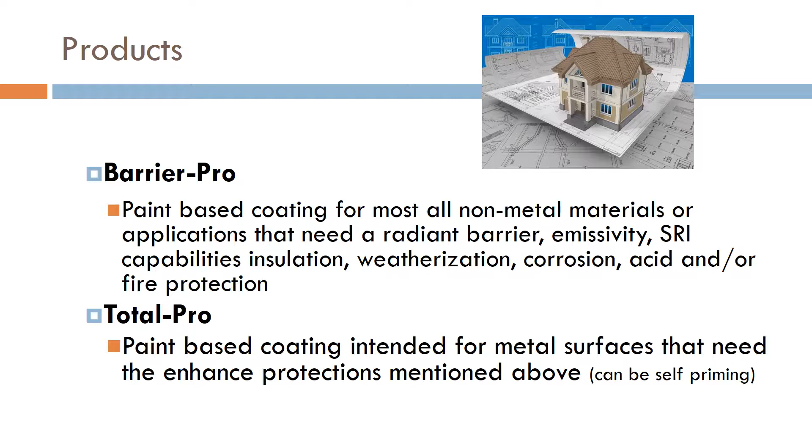corrosion, or fire protection is needed. Total Pro is intended for metal surfaces and provides the same protections mentioned above.

With recommended R values, on average 50% of a total home's energy use is still directly attributed to heating and cooling loads. Slabs account for 20%, ductwork 13%, and roofs 13% of total heating and cooling loads.

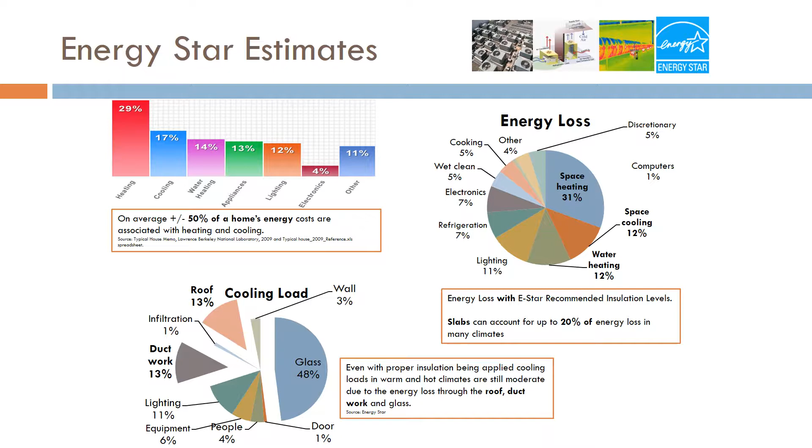The industry's primary use of R value to base insulation energy recommendations on is why 35 to 50% of energy costs are still directly attributed to heating and cooling.

There are numerous issues with R value itself, including being dependent on temperatures, making it very manipulable. Of the three primary measures of energy loss, R value, or conduction, is a tertiary or third line of defense

for energy savings. Heat energy can first be either reflected or absorbed, second can be emitted or transferred, and last can then be conducted at a measurable rate.

This rate of conduction is R value. The three secondary variables deal with convection and moisture and can easily be mitigated through proper weatherization protection.

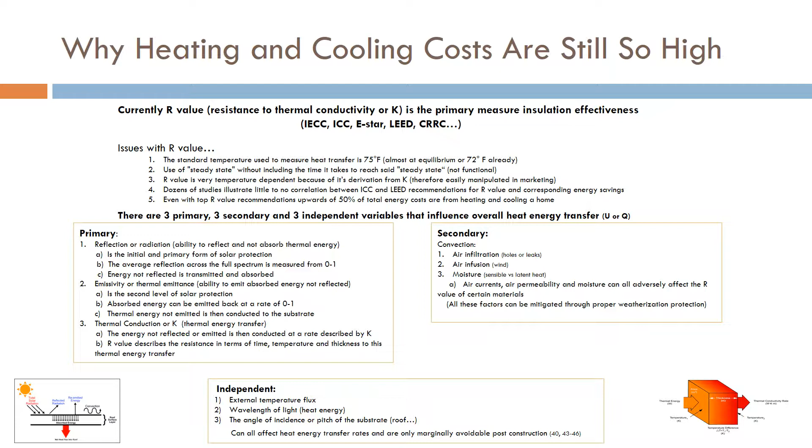Solar reflectivity is the average percentage of solar energy reflected across the full spectrum. This is measured in ASTM E1918.

Solar reflectivity recommendations vary by organization and pitch of roof: 25 to 29% plus for steep pitches and 65 to 78% plus for flat low sloped roofs.

Average reflective products range from 25 to 80%, and Harbrin coatings range from 89.1 to 99.8%.

Emissivity is measured in ASTM E408. Average products range from 20 to 60%, and Harbrin coatings are rated at 77 to 91%.

The Solar Reflectivity Index utilizes both the reflectivity percentage measured in ASTM E1918 and the emittance measured in ASTM E408. Recommendations range from 29 to 78, and Harbrin coatings products provide 88 to 100 plus.

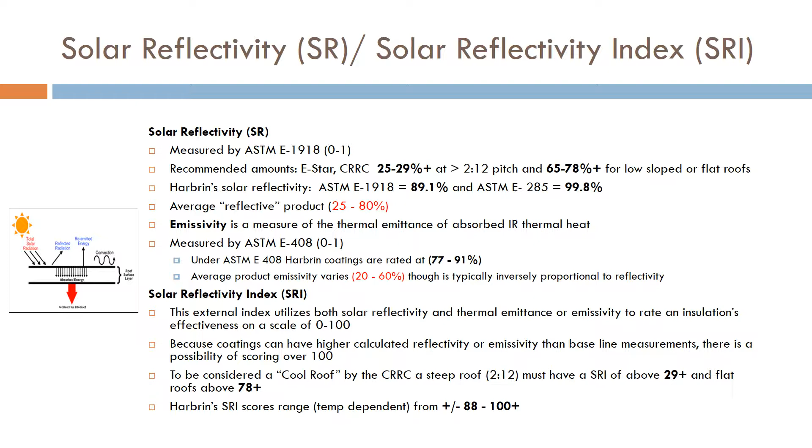Harbrin coatings far surpass any organizational, local, national, or international code under IECC code requirements for reflectivity, emissivity, and SRI values. International and local code varies.

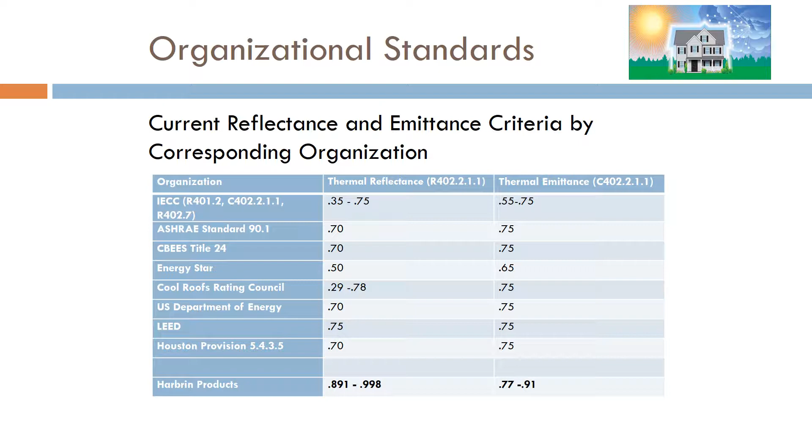However, Harbrin meets and exceeds energy savings IECC code with our ASTM E1918 and ASTM E408 certified testing.

We also meet and exceed most ICC or IBC fire code requirements with our certified ASTM E136 testing.

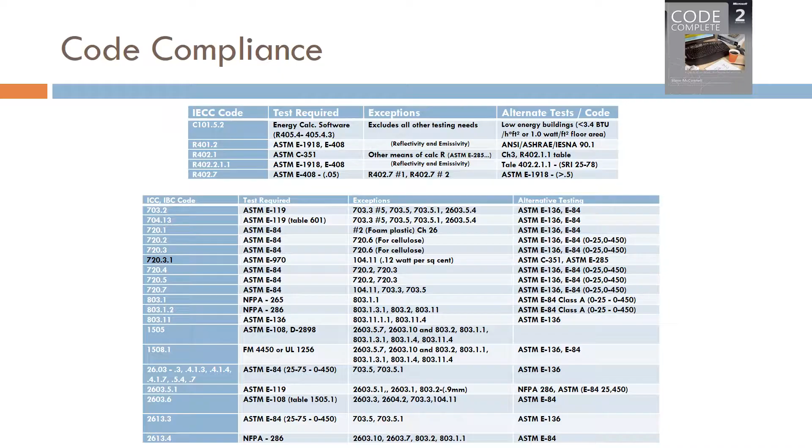Harbrin coatings have numerous other certified ASTM testing for weatherization, corrosion, fire, and insulation protection as well. Harbrin coatings are environmentally friendly with low VOC counts.

The coatings are easily applied with traditional paint applicators with minimal health or safety precautions. The DOE, CEC, DoD, Geoscience, Southwestern Laboratories, and other companies have all further functionally certified our ASTM data.

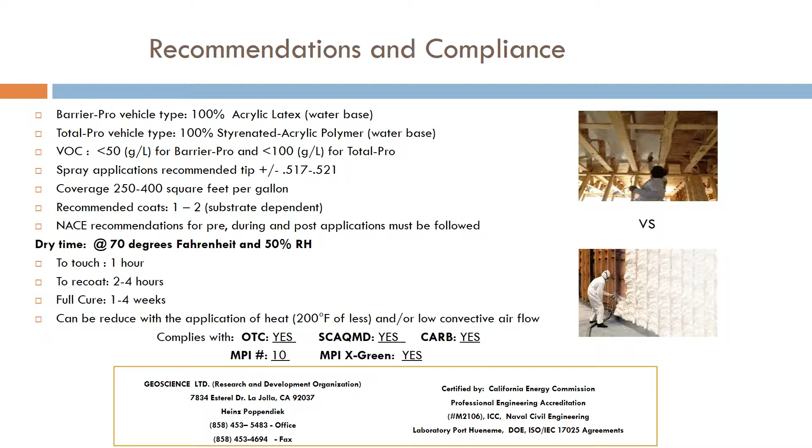Barrier Pro is intended as an exterior protective coating, however, can also function inside between air gaps, in attics, ventilation ducts, plumbing, furnaces, slabs, and more.

Surfaces including roofs, stucco, wrapping, wood, asphalt, brick, concrete, metal, and numerous others. Total Pro is intended for most all other metal surfaces and can be self-priming.

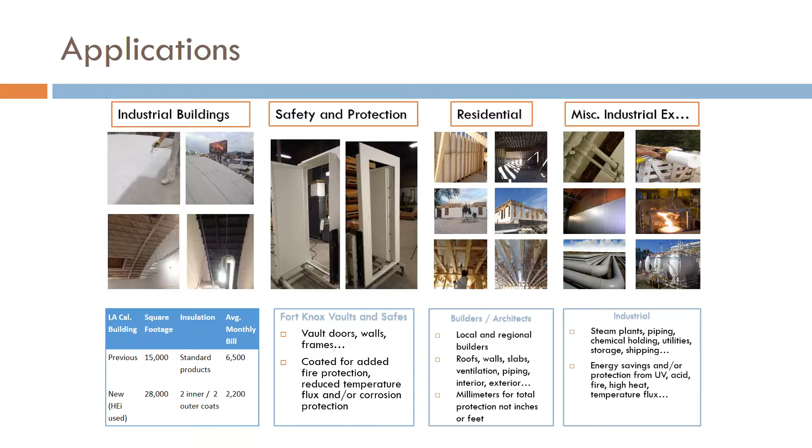Barrier Pro covers 200 to 400 square foot per gallon at a cost of 25 cents per square foot per coat. Total Pro covers 200 to 400 square foot at a rate of 50 cents per square foot.

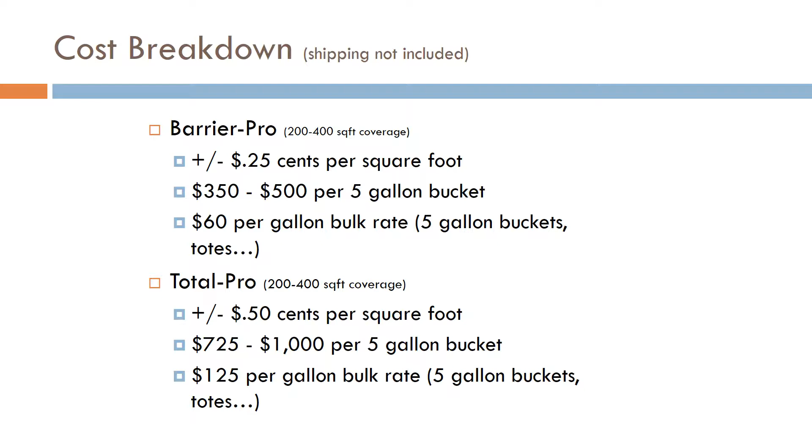1 to 2 coats is recommended for both coatings depending on the substrate. Barrier Pro and Total Pro can resist 3,000 plus degree temperatures and fires.

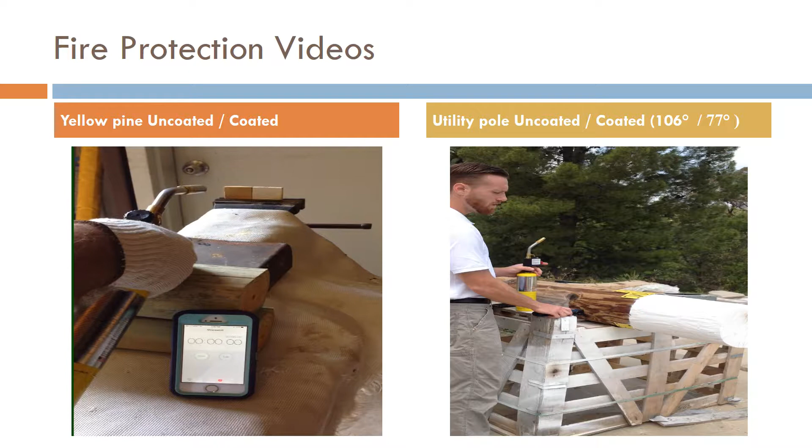Under ASTM E136, our coatings are rated as non-combustible, allowing us to automatically meet most ICC and IBC fire code requirements. In this video, a 3-minute burn test with a 3,000 degree MAP gas torch is done on a small

block of coated and uncoated yellow pine building wood. You will see the uncoated sample immediately catches fire and ultimately burns completely through. The treated sample reacts to the heat and protects the wood underneath.

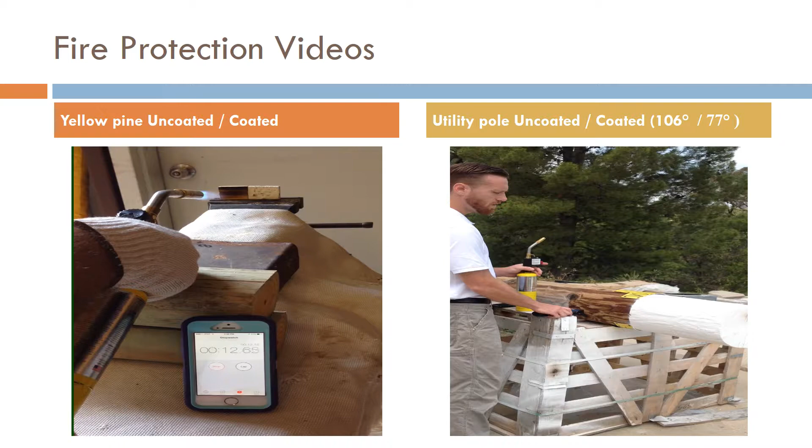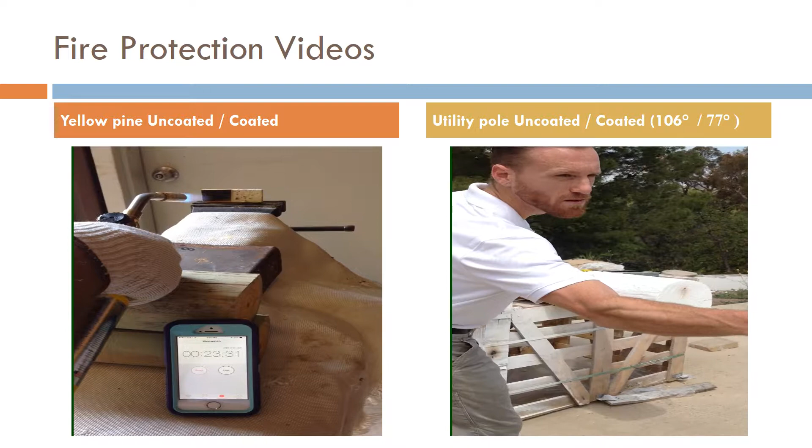In this video, a 1-minute burn test with a 3000-degree MAP gas torch on a utility pole. A temperature reading of 106 versus 77 illustrates the coating's ability to both radiate and emit thermal heat.

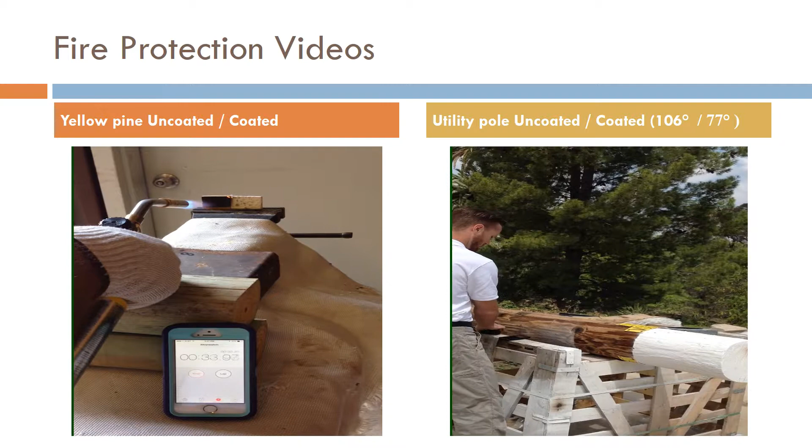You will see the uncoated side immediately catches fire and continues to burn throughout the video. The treated side turns a slightly yellowish brown as it reacts to the heat and seals out the fire.